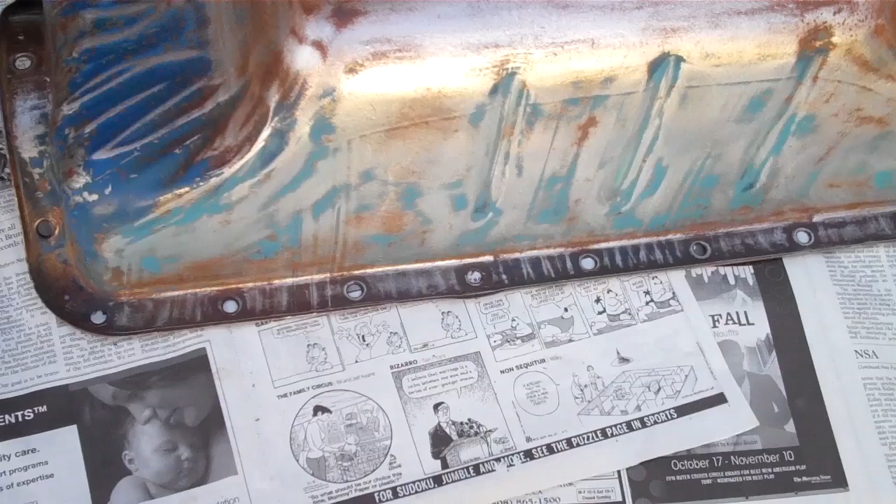There's my oil pan for a 66 Ford pickup. I just took the DA sander with some 60 grit and then some 80 grit after I scraped it.

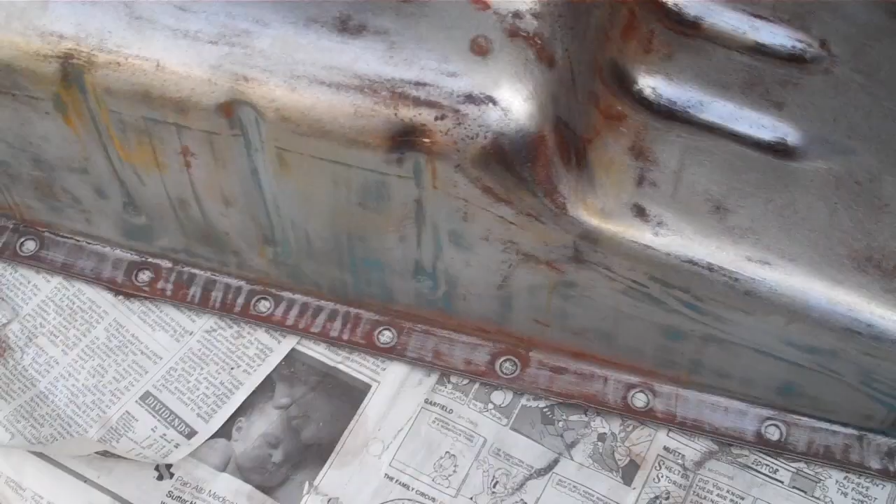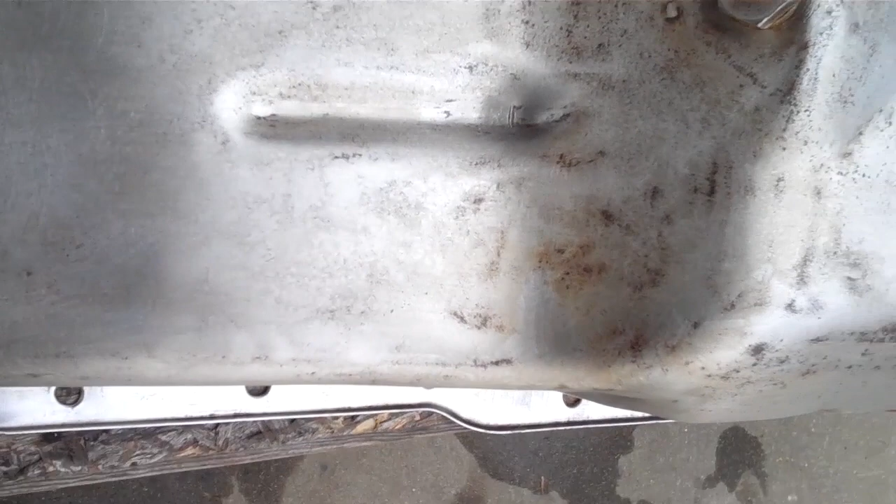I took the wire wheel to it, and some sandpaper. I needed the wire wheel in there particularly, and you can still see some rust on there. I had to use the wire wheel because the vinegar and water wasn't working too well. It got the rust, but then it started to flash rust, along the rim also. You can notice you get some flash rust there. I'm going to take some sandpaper to it, but it got the rust off really well.

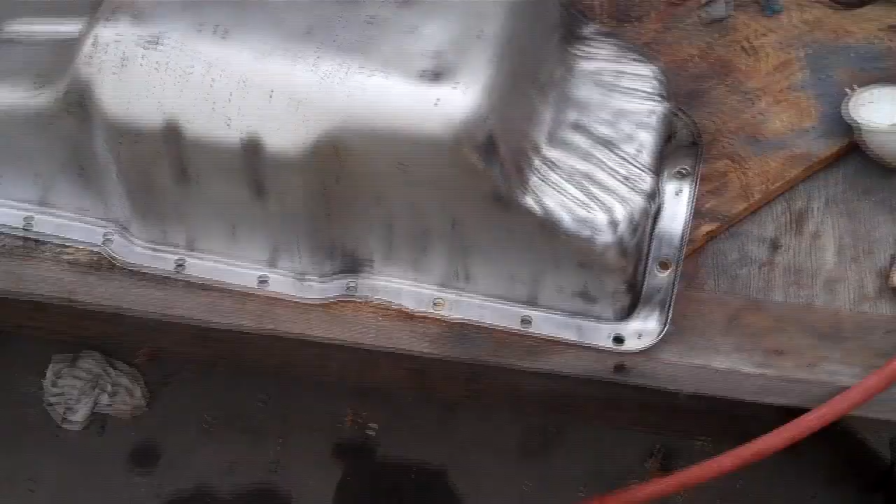There you go, all painted up and ready to go on. It's been a while since I painted it, so it should be nice and cured. It's been a couple of weeks actually. Inside's all nice and clean.

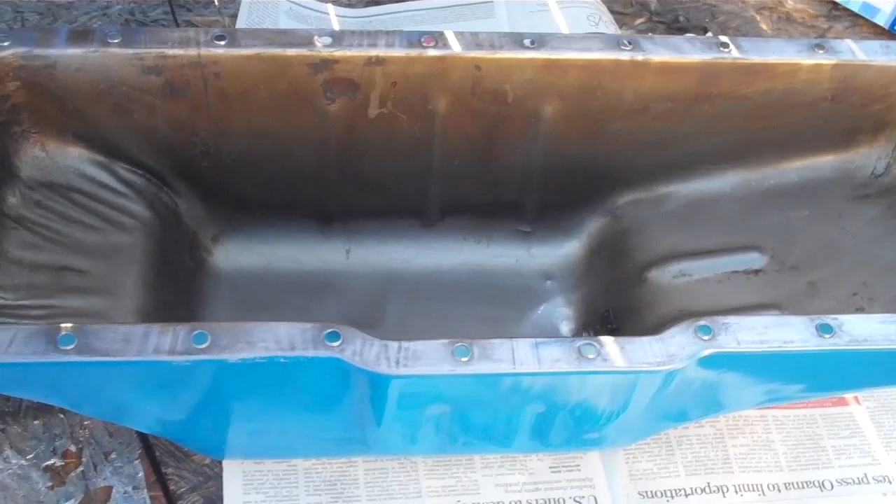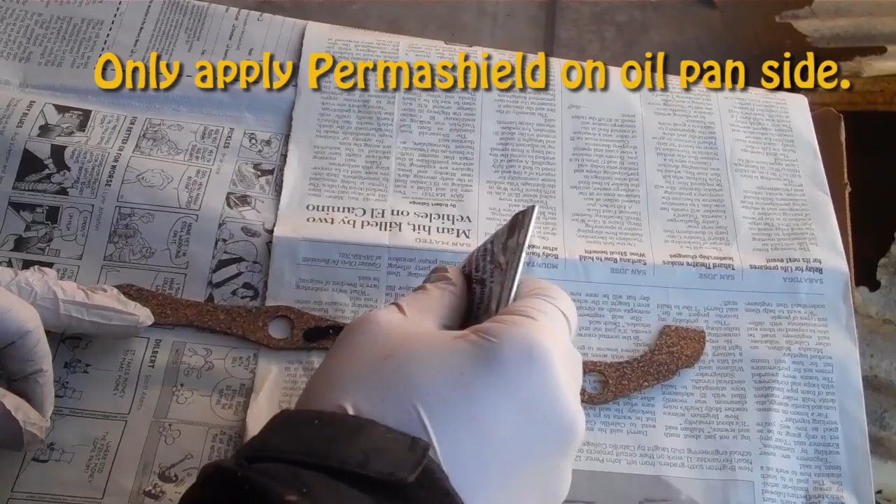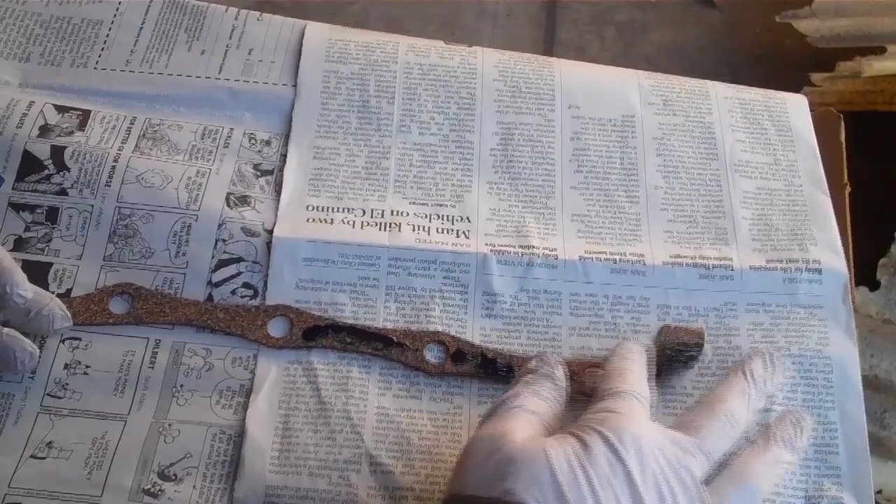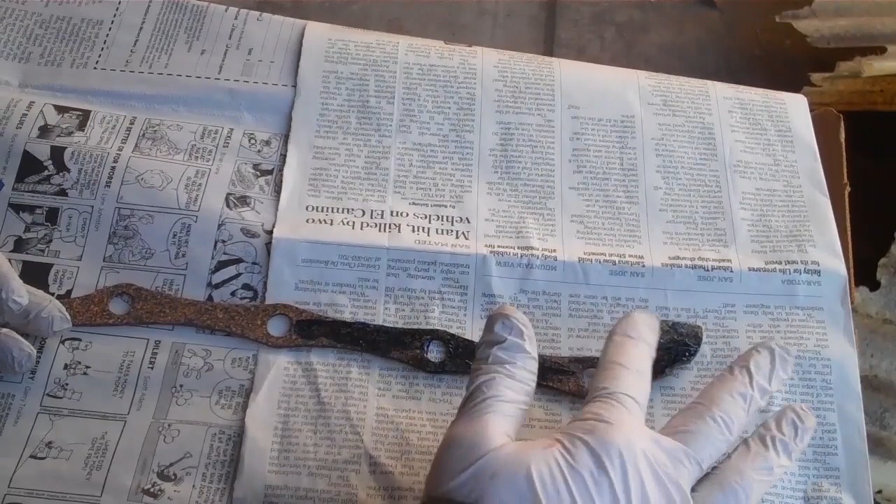So it's ready to go on. Here's where I put on some Permashield fuel resistant gasket sealant. I'll put it on thinly so it can air dry. Bead that out. Just hold it in place, not to try to seal it or anything. Very thin. It's blue, but it looks like it's black. Not too much there.

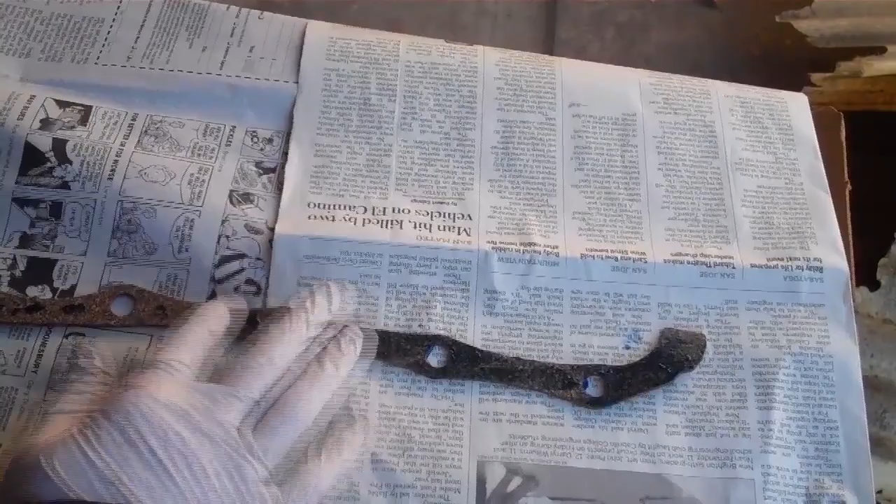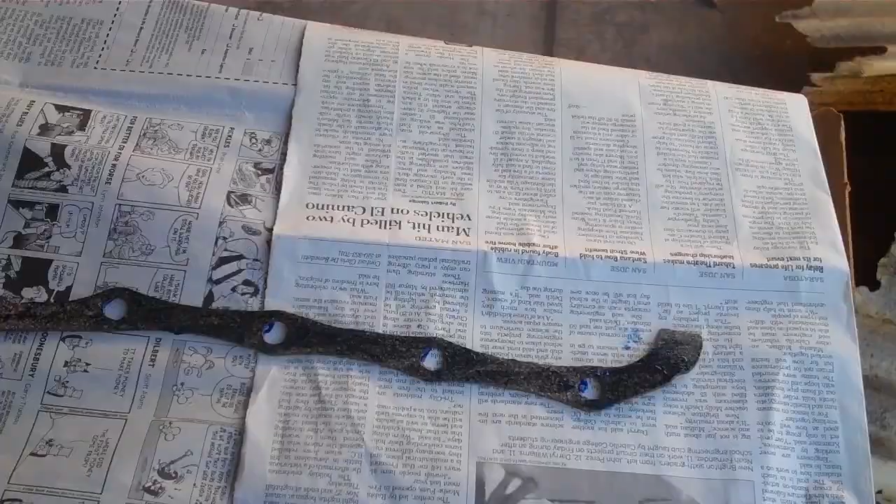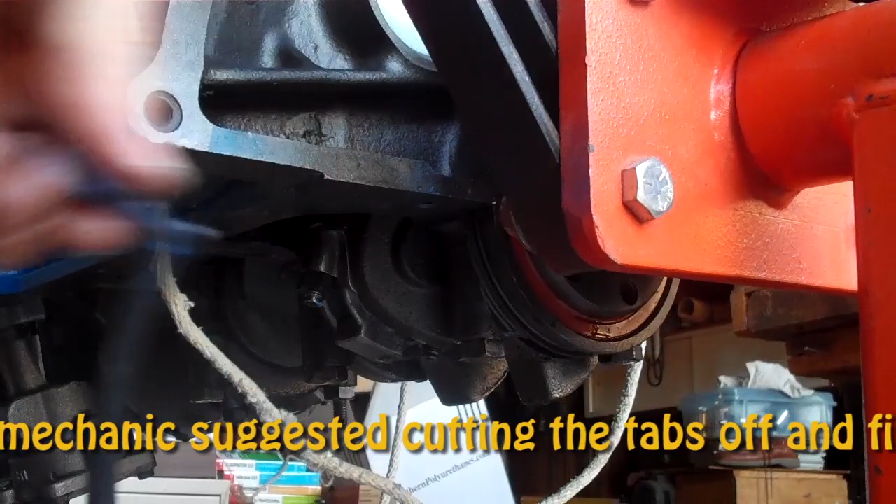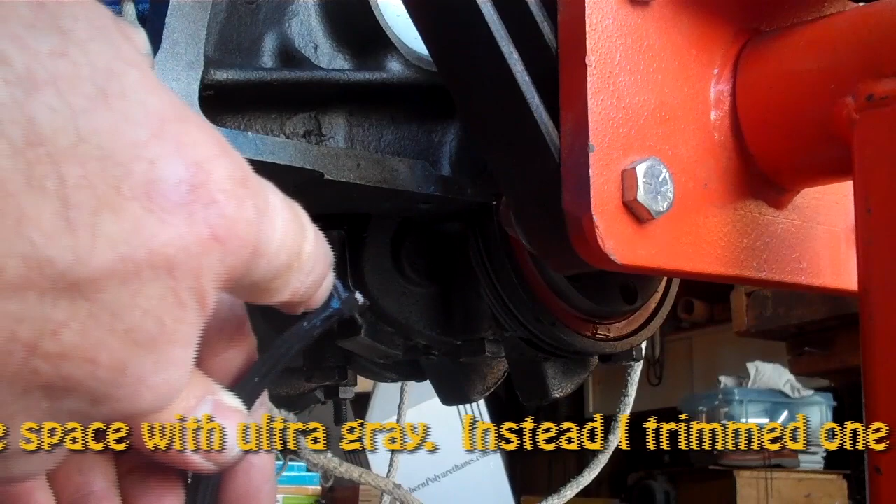I'll go ahead and do the whole gasket. I had to take the oil pan down for the 4th time because this tab here is not going up and seating by the rear main seal. So I just did a dry fit of this gasket here. This fits over the end of the oil pan. I did a dry fit on the rear main seal, and it just won't go in the gap. So now I have to figure out what's going on there. This tab has to go up inside the gap by the rear main seal to seal it. I thought it was me, but it's not me, which is good. You can see the gap right next to the rear main seal is different on the right side

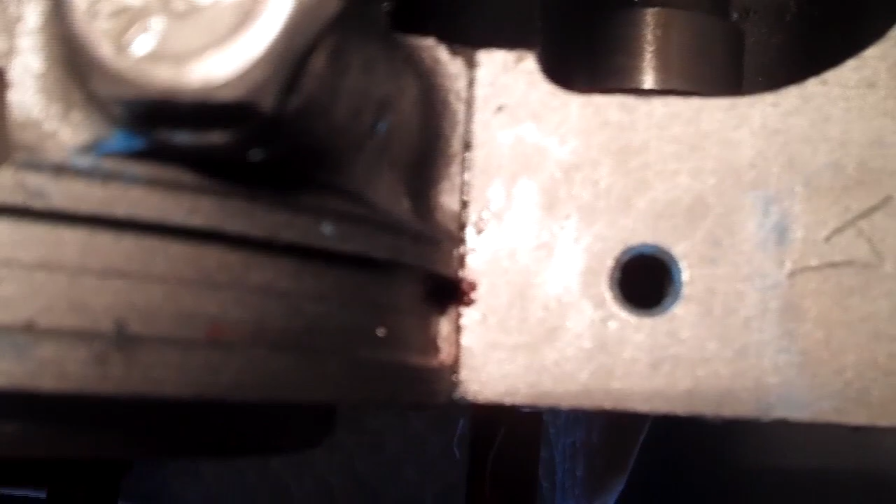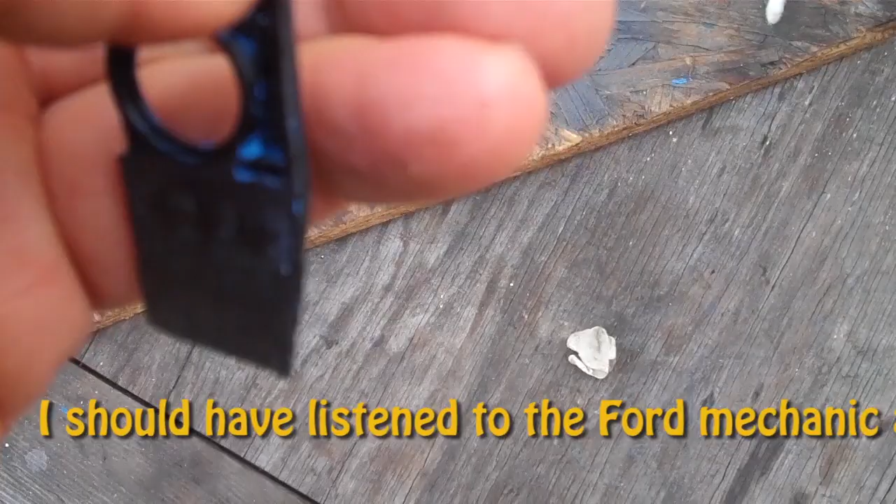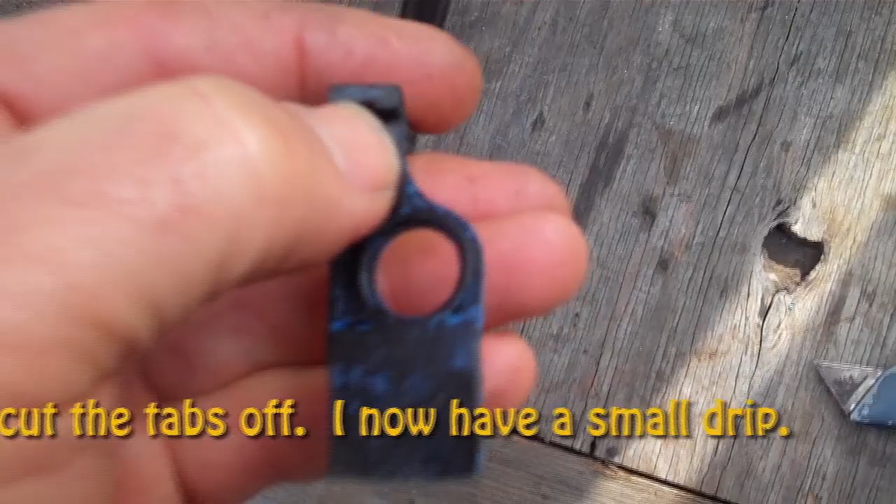than it is on the left side, and that's why I was not able to get the gasket in there. Just turn it upside down so you can get it there. It's not in the light that way. Interesting. So what I did, I came over on the other side and trimmed that up. You can see where I trimmed off the side there. You can see where it used to go, where my thumbnail is. Pull that away a little bit, where the thumbnail is. See how I cut off the little divots there on the other side, so I made it flush. See how much thinner it is? Now it fits into the channel.

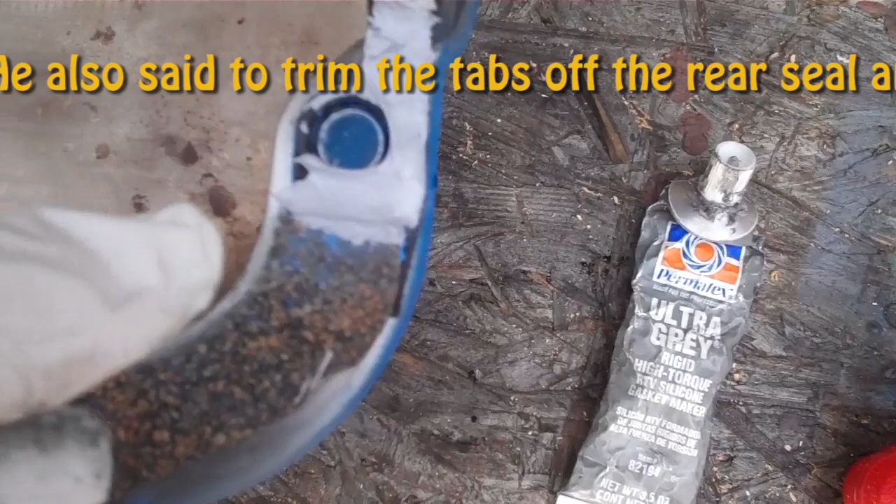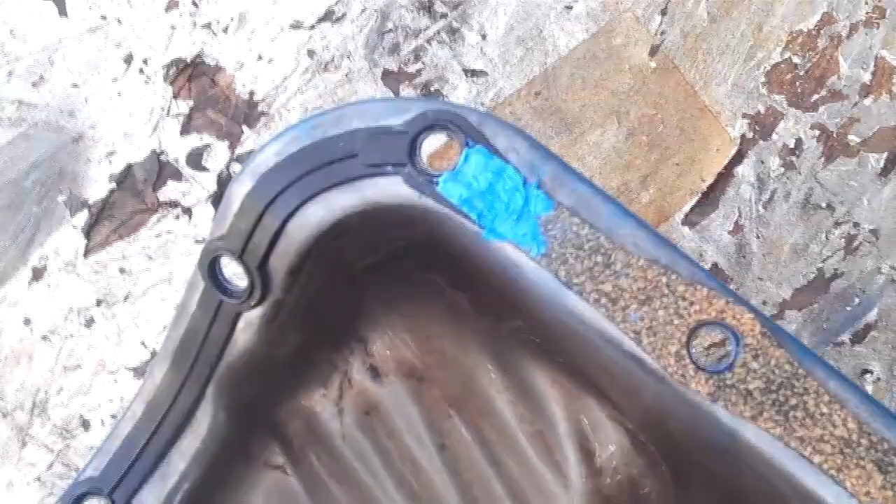I applied Ultra Grey, you can see there. The guy at Ford supplied me with this, and he said that's what you need to put around the back here of the seal and around back there. I did use the Ultra Blue again over on the front. So now I'm going to go install. Looks like the seal is in there nicely. Looks good. Now I'm going to go around and tighten it up.

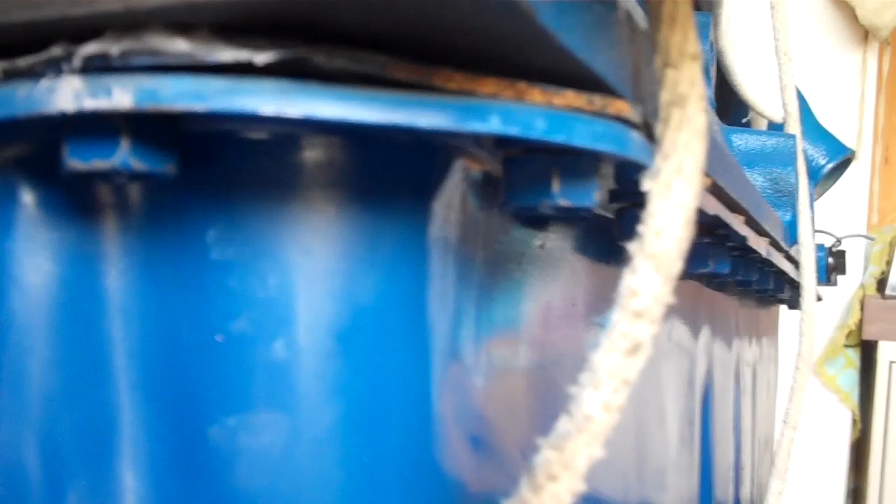And fit in the gap there, got that gray on there. Just going to go along and tighten it all up, starting at the center and working my way out on either side. But it looks good. It's hard to see here, but looking up in there, you can see it's seating properly.

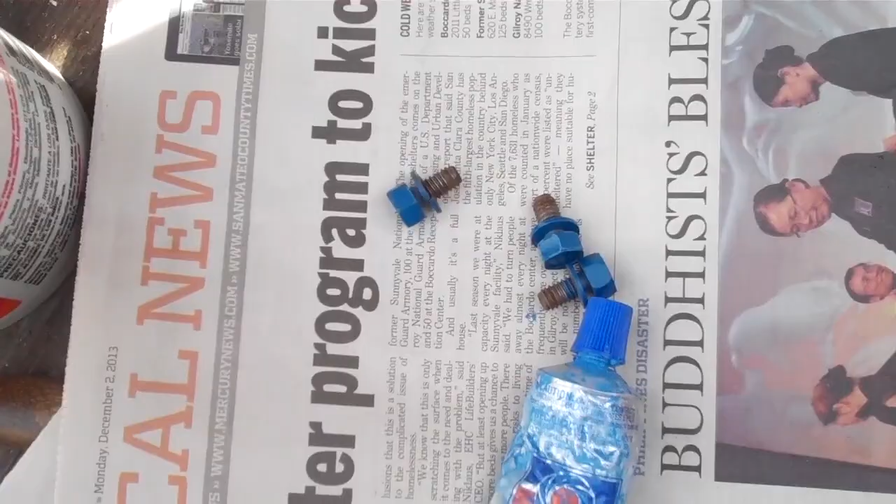Beautiful. I'm going to put some of this Ultra Blue on the small bolts that go into the timing cover so those are coated nicely. Just get some, put it on the tip. Notice I'm not using that thin tip anymore.

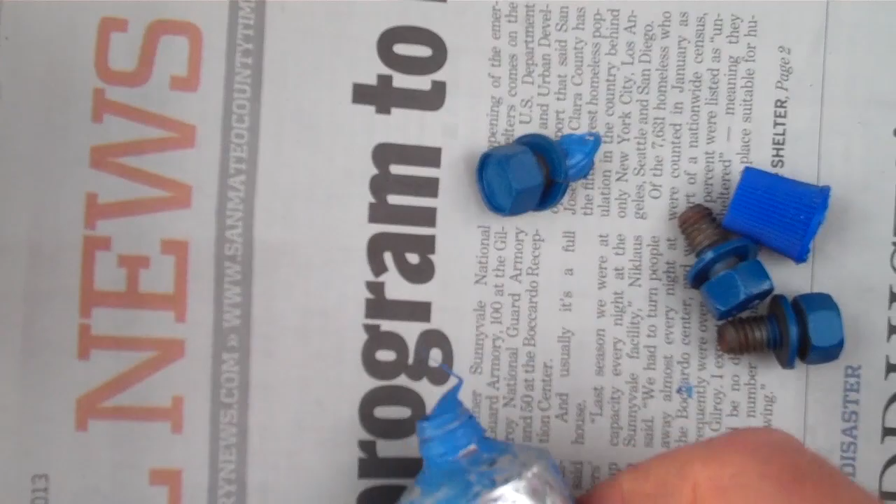Okay, I'll do that and smear it around, put them on and install. Now I'm going to insert some Ultra Blue into the cover and just put it on the threads there so it doesn't all come off the threads when I thread them on, and I tighten them up. Just make sure there's some glue that protects.

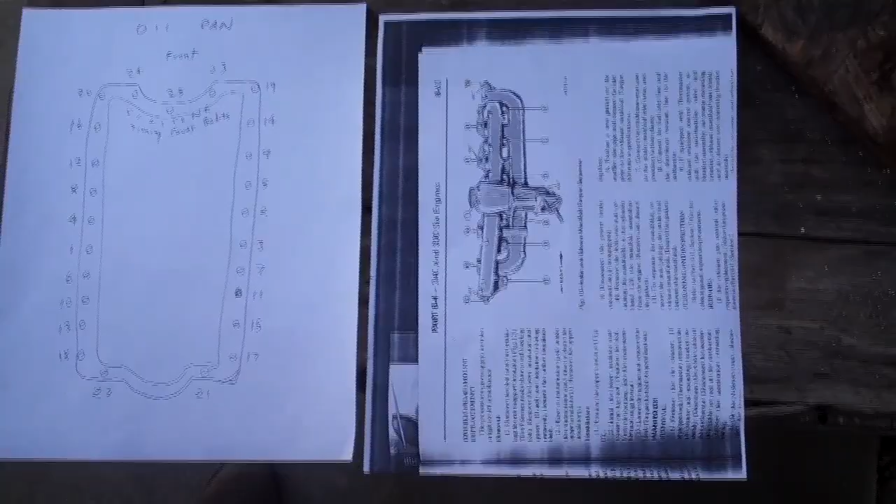This is the tightening sequence I used. I don't know if you can read it: 1, 2, 3, 4, 5, 6, 7, 8, etc. Now you base that on the tightening sequence for the exhaust manifold and the intake manifold, tightening from the center out. Same here, tightening from the center out. So that should be beautiful.